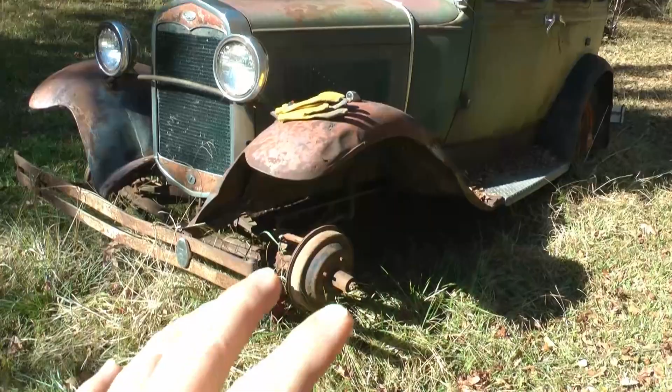But as it sits now, this car is bone stock. Stock frame, stock drivetrain, stock everything. I have not begun tear down yet. The interior appears to be a completely stock interior. The guy I bought this from said the guy he bought it from had it restored, whatever restored meant, back in the 70s.

So let me move in the shop, and I've got a pretty good list of parts — not list, I've got a pretty good stash of parts that I've already bought. Parts from Speedway, parts from Summit, and just parts from parts, pieces and parts. So let me get in the shop right quick, and I'll show you my to-do want list and talk about a few of the parts I'm going to be using. So just hold on a second.

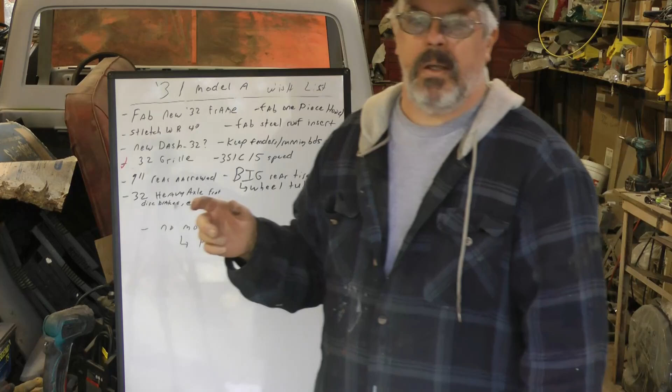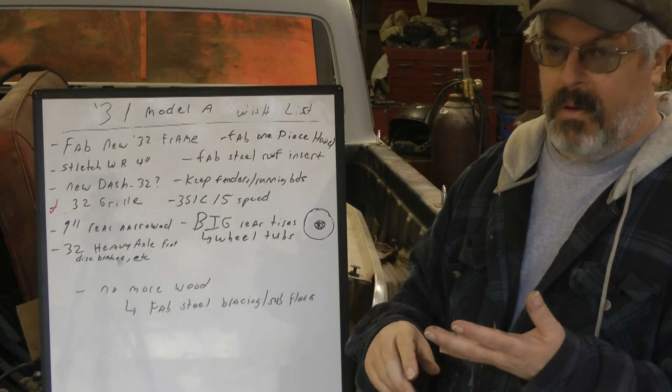Alright, so on my Model A, first thing I want to talk about is my build list, wish list, whatever you want to call it. First thing, I'm going to build a 32 style frame from scratch. I've seen a few folks do it, I've heard of people doing it, I know people have done it. I'm one of those types that if they can do it, I can do it. I've got the tools, I'm a fabricator, I can weld, all that good stuff.

Part of the reason for doing that was a couple things. I want to do it for the dollars, and I'm going to stretch the wheelbase 4 inches or so, something in that range. The reason is I'm building a street rod, so I'm going to have a modern drivetrain. Those 32 engine bays are really short. Lengthening the wheelbase will allow me not to have to squish the engine into the firewall or the radiator.

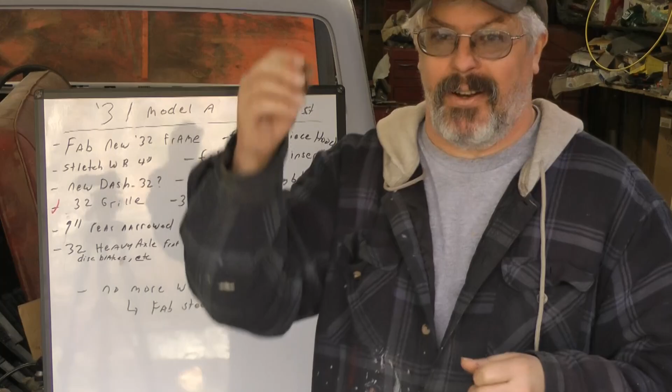Not scrunching the firewall back, up in my knees and chest. I'm not overly tall, but not short either, so I want to get as much cab room inside these things as I can. If you've never been in one, I was shocked how small those things are inside - I'd only ever seen them in magazines. You don't realize it till you get up there and see one for real. So anyway, I'm stretching the frame, making my own frame. That's wish list item number 1, or 1A, however you want to call it.

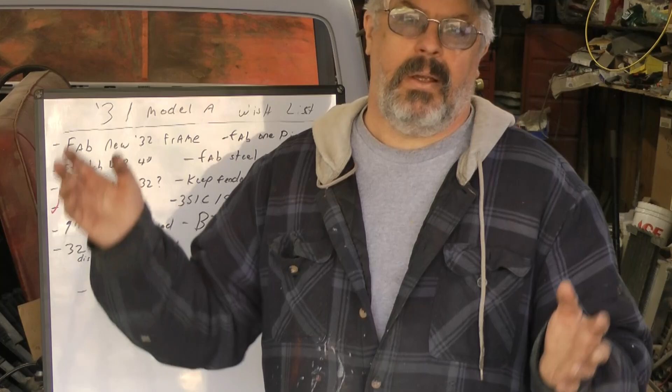I went ahead and wrote it down. Probably gonna get a new dash. As far as the fuel tank and dash goes, I'm not going to use the Model A style fuel tank obviously. So I'll take the fuel tank out and either cut the tank off and keep the original Model A cowl skin, or if the tank happens to be good - and the car's in pretty good shape, I'd say 60-40 odds it's good - I don't have the heart to cut up a good stock tank when there's folks looking for an original one that's not full of holes. I'll find out when I get that far, and if it's good I'll probably try to sell it. So anyway, it'll be a modern fuel tank, either in the back or in the side rails, something more modern.

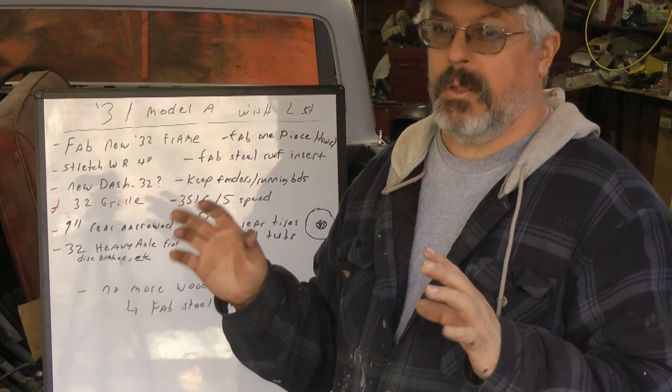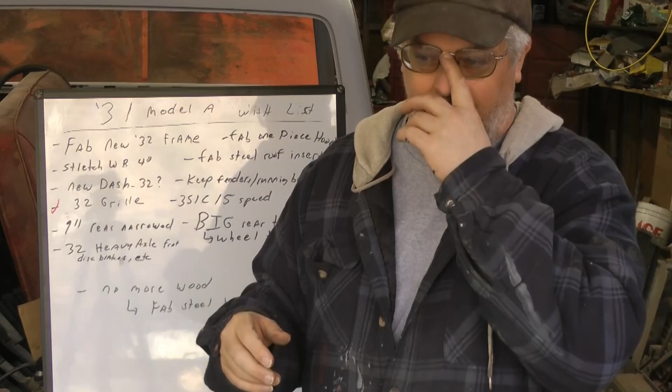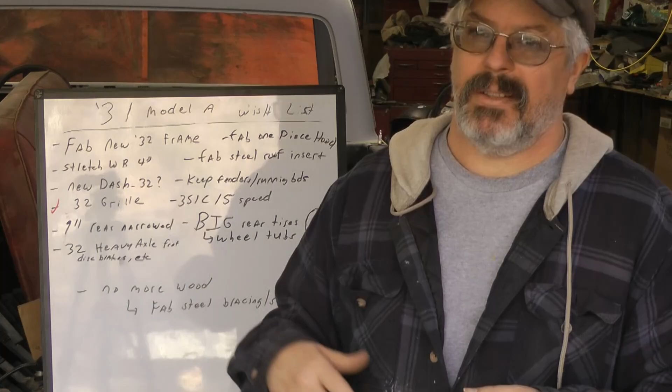Going on down the list, 2 or 3 of these items are related, part of the same big project. I'm going to put some big wide fat tires on the back. I've already bought some, I'll show you in a moment - 12-inch wide street tires. I've always wanted that big and little hot rod look. I thought about 15s or 18s, but those are really damn expensive. The 12-inch tires I bought are almost $500 a piece, so the 15s or 18s were even more. That's just going too far. I love that look, I wish I could've done it if I'd had more pocket change, which I didn't and don't. Whatever, I bought 12s.

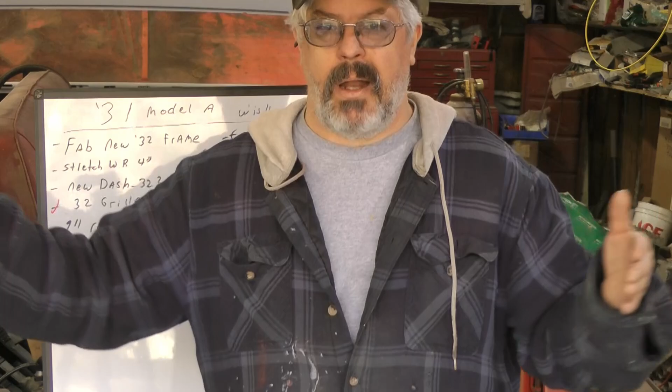So obviously I've got to narrow down a rear end. I've got a 9-inch Ford rear out of a Ford truck that's way too wide, so I've got to narrow it anyway to fit those big tires. That'll also mean some small-ish wheel tubs inside the cabin - they won't be huge, but there'll be some tubs in there, wider than normal. So anyway, a narrowed 9-inch Ford rear end, some wheel tubs, and some big old fat tires.

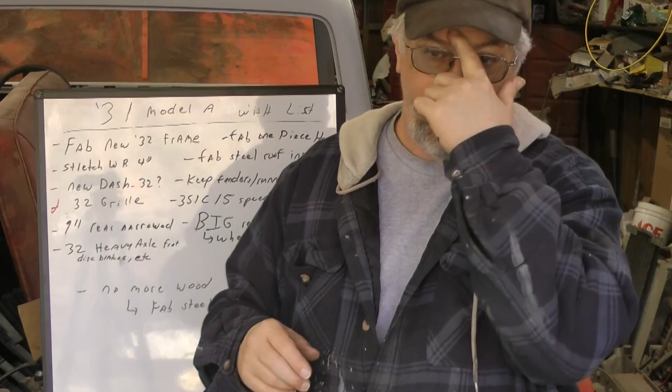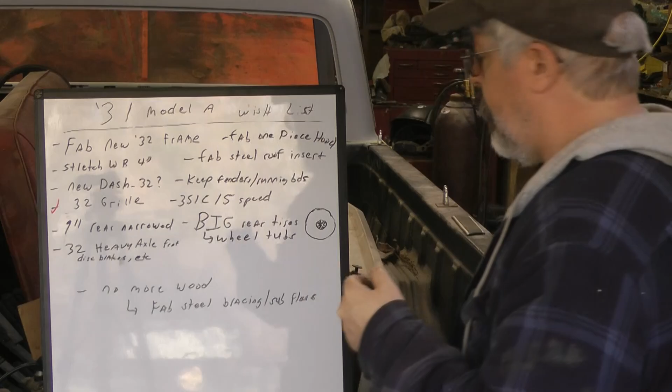As I said, I've already bought the tires, I'll show you them in a minute, the rear tires. I've already bought the wheels also, I'll show you them in a minute - well, they're in the box, I'm not going to actually unbox them. I've got a photograph, I'll show you that here in a minute too. Or maybe I won't, I may keep the wheels a secret. I don't know, we'll see.

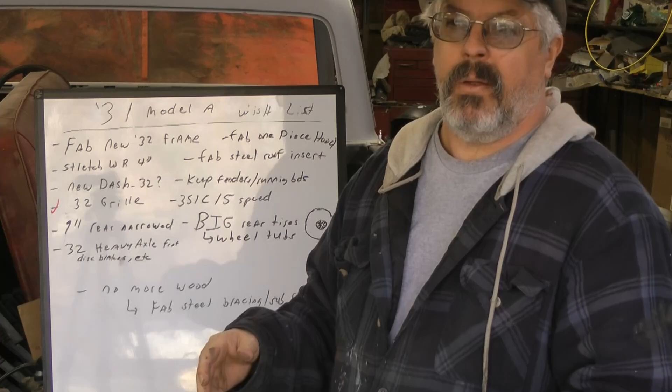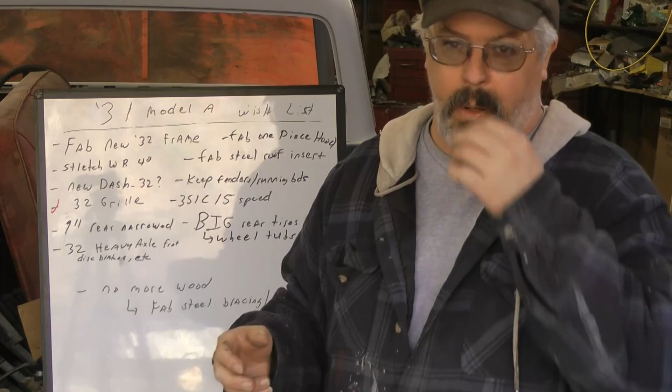As far as the front end goes, I've got a completely new front suspension, everything. That was interesting. I'm not reusing any of the stock axle, spring, spindles, none of that. It's going to be all a modern drive line, front to rear, rear to front, however you want to put it. So I'll have a complete original front end setup that I'm not using. I may wind up trying to sell it one day. I know a lot of folks are trying to build traditional and looking for that stuff, but mine's going to have a new axle, spring, spindles, everything.

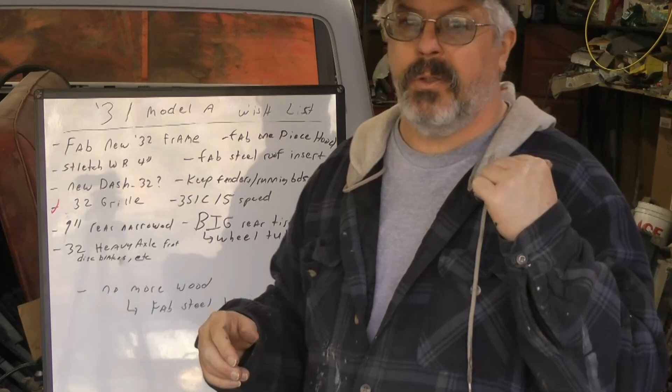I bought it all from Speedway, well, most of it from Speedway. I got a Posies 32 heavy axle reproduction axle and their spring that goes with it, and then I've got brakes. All the other stuff came from Speedway. Thank you, Speedway, by the way. Not sponsored. I bought all this stuff with my own money. No sponsorship here. Well, I ain't big enough for that yet.

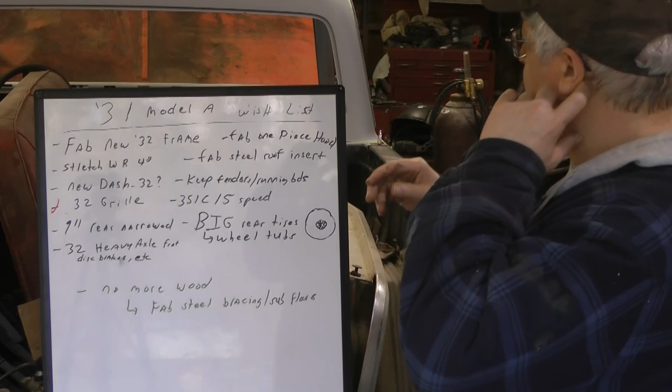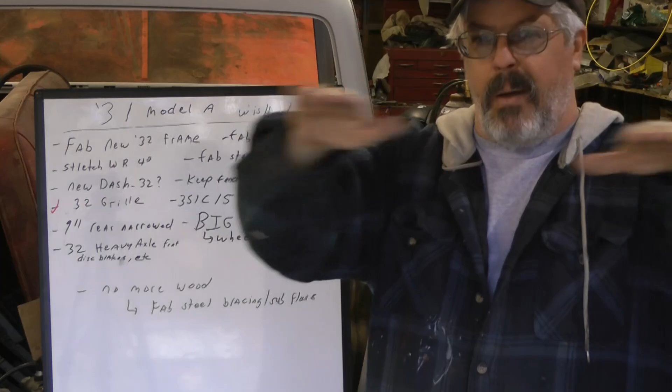But anyway, next on the list, I want to fab a one-piece hood, not really one piece top to bottom. I'm going to make a top piece. The original folds in the middle. I want to make a one-piece hood, and obviously my wheelbase is going to be 4 inches longer, which means the hood will be 4 inches longer in some fashion. So I've got to make a new hood anyway. I want to fashion a one-piece top hood. I'm probably not going to run hood sides, but then again, who knows? I haven't thought that far along to decide yet. The picture of the car I have in my head does not have hood sides, we'll put it that way. We'll see.

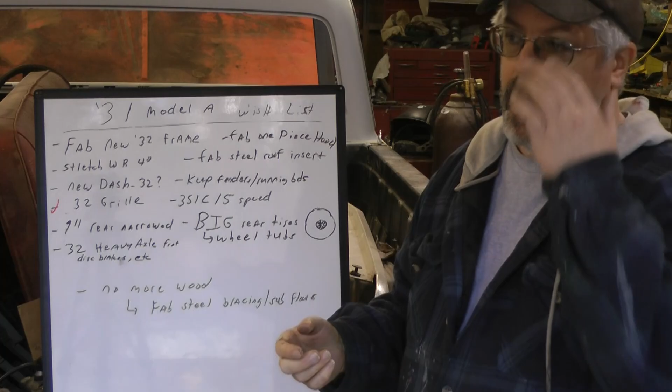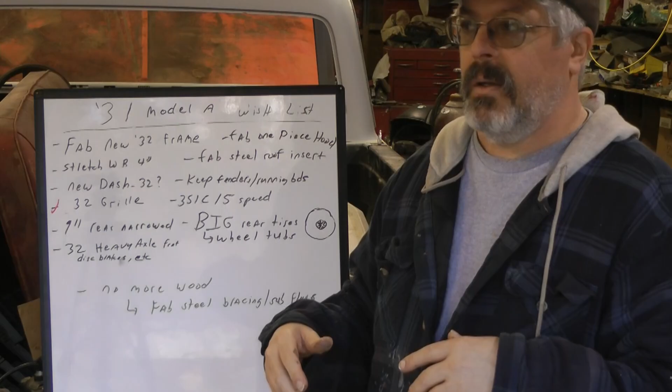Okay, for the roof, everybody knows the Model A has the insert. I guess it was fabric originally, I think. Obviously I have a Sedan, which has the bigger roof, but I want to make a steel roof insert. I'd like to buy one, but those things are expensive. The shipping is tremendously high because you have to ship them by truck. I believe I can do it. There's not a lot of curve on the edges of those things, the roof insert is mostly flat. I've watched some guys on YouTube talk about them or make them, and I believe I got some strategies. I don't have a power hammer or any of that stuff, the big tools like those guys use, but I've got some ideas in my head. I think of how I can do it with the tools and skill level I have. I think I can do it. Again, that's way down the road, but it is on the list.

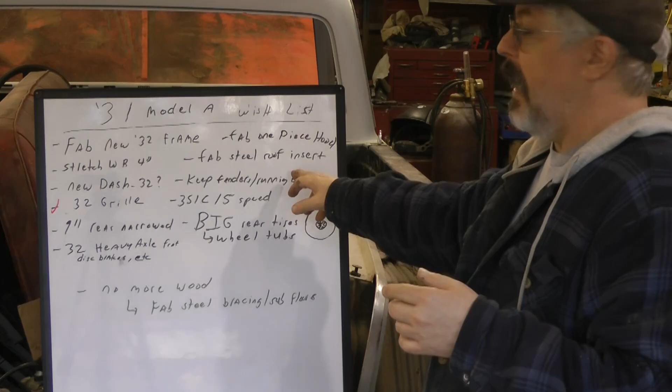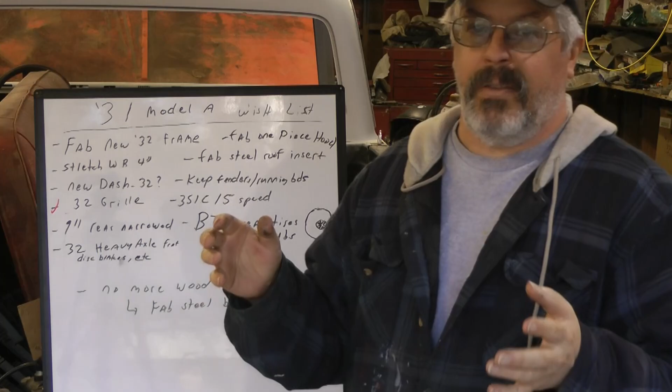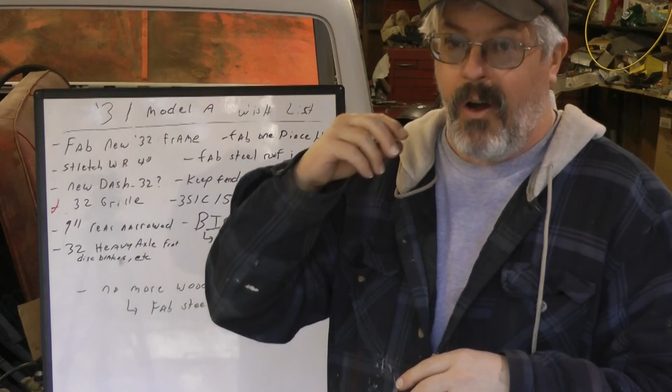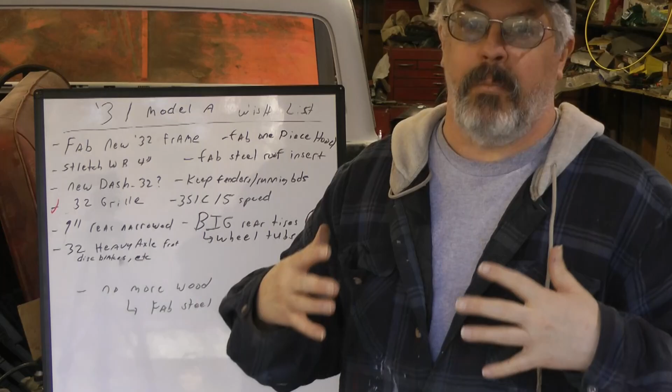Now here's a big one that I'm going to get a lot of argument over, I'm sure, if I get feedback or not. I am keeping the fenders and the running boards. Yes, I said it, I know. Fenders and running boards. I love the look of a full fendered street rod, 32 or 31, all those years, Chevrolets, it don't matter what kind of car it is, what year it is. I love the look of those fat fendered, full fendered street rods. And there's roadsters, high boys out the yin yang out there. No offense to anybody that owns those cars, they're great cars. There's some incredibly famous cars, some great cars, the roadsters and the coupes and all that stuff. I got no issues with them. But for me personally, I love the fat fendered street rod. So that's what I'm going to do. I'm keeping the fenders and I'm keeping the running boards.

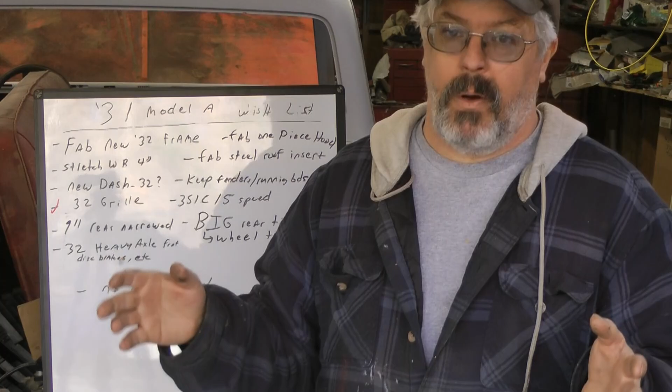Now, I know I just said 32 frame, extend the wheelbase, modern driveline, which means wishbones or something. So there's a lot of pieces of that puzzle that don't exactly fit, that I will have to work out one day. I'll have to probably make running boards, which I'm not too concerned about. The fenders are obviously totally different in the rear on a 31 to a 32. I'm talking about the front fenders, sorry. And then the wishbone sticking out and the curve in the rail, and there's a whole lot of things there that has to be worked out. I know that, but that's my plan at this point, and I hope it stays. I hope it comes to fruition. I hope it comes true.

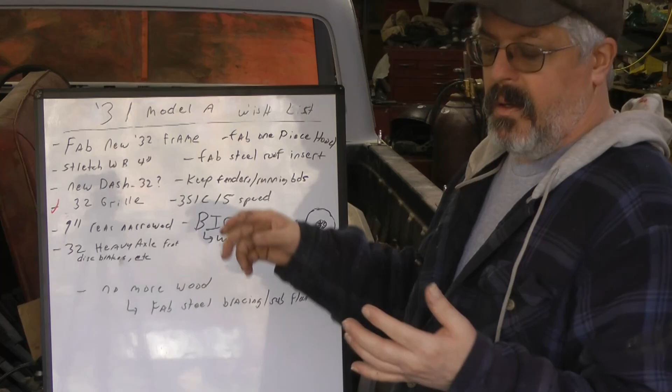As far as running gear, I've already talked about the 9-inch narrowed rear. I have two 351 Clevelands. One is an original 351 Cleveland that was in the car my dad bought new in '72. So that engine has been in my family its entire life, kind of. It's been out of the car for 20 years probably, because the car's been gone for years. But I pulled the engine out and saved it, because the Cleveland is one of my favorite Ford engines of all time.

I also have a 4-bolt main Cleveland block I bought many years ago that I may use, I don't know. What I've read over the years is that the 4 bolts on a Cleveland didn't really add a lot of strength like they did maybe on the Chevrolet - having a 4-bolt versus a 2-bolt. But I've got a complete Cleveland and a block I can build up. I'm probably going to go with aluminum heads, all that stuff. So I don't know, we'll see.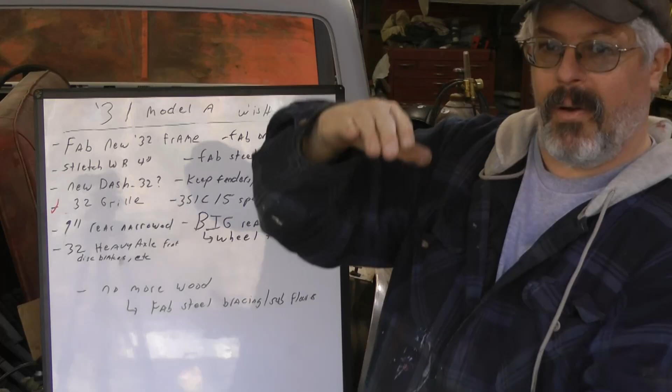I'm thinking about stroking it. That's a big... the pile of money here is just starting to grow exponentially. So I don't know, and Lord knows this little car wouldn't need that much power. The stock Cleveland alone with some good aluminum heads is going to make plenty of power for this little car especially.

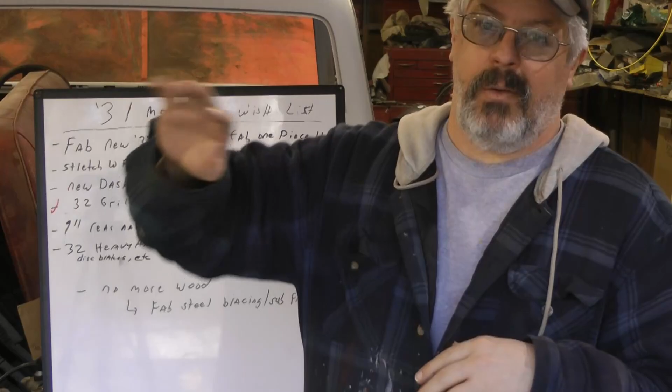Now there is a wish list item - well, not really a wish list, what's the term... whatever. I'd love to put a blower on this car, but that's, I think, $5,000, $6,000, $7,000 - way out of my price range. So that's more than a pipe dream item. Put a blower on it - that's more than 99% not going to happen.

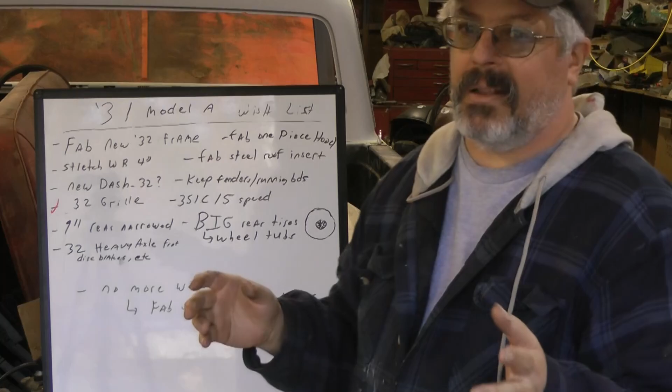I could do 2 4-barrels or 3 deuces or something different like that, I don't know. Well, that's way down the line, way out. But the point is that Cleveland's gonna make plenty of power anyway without having a blower on it or being stroked or all that mess.

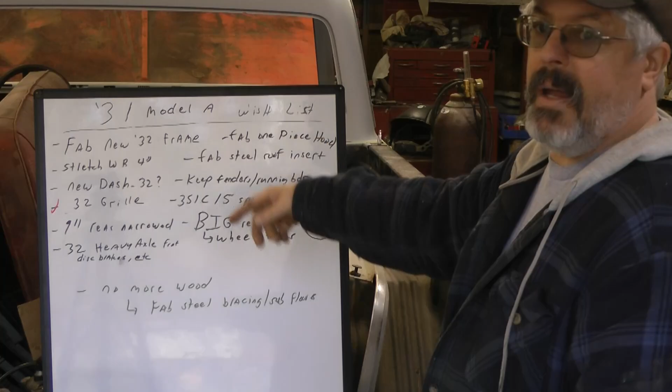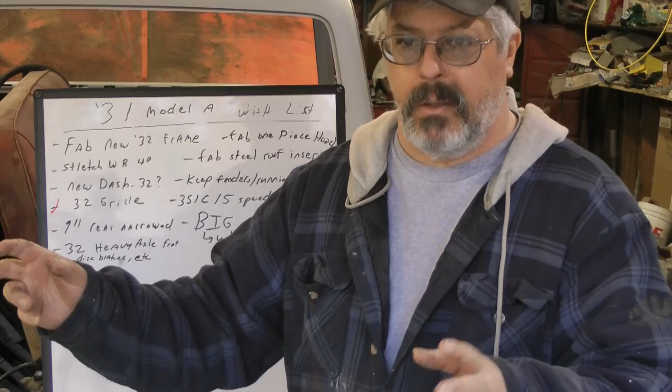So as far as my wish list goes, the things I've got written down, that's it. The one last thing I wrote at the bottom was just for my memory, to talk about it: I'm going to make a new subframe for the car. It's got to fit the '32 frame anyway. The car seems to have a pretty good floor in it, but I don't know how good it is. I'm probably just going to wind up making a new floor, new sub rails, get rid of all the wood - I'm not sure how much wood's in the sedan, that's a '31. I'm going to get rid of all the wood, whatever it takes to brace it with steel. That's what I'm going to do. New subframes, new floor, all that good stuff.

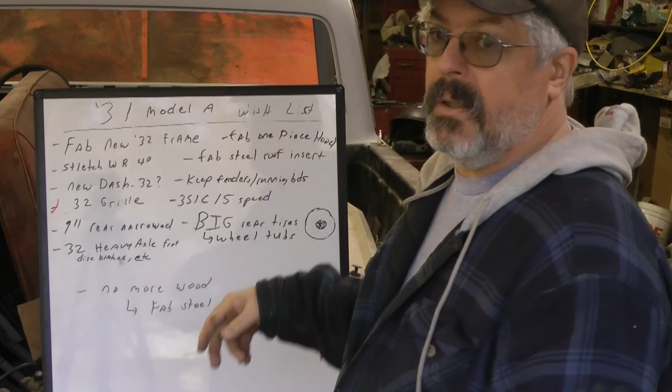So here's the rear tires. They're 12 inches wide, 29, 30 inches tall, something like that. They're Hoosier, they call them street radial, something. Black walls, you know - look up the Hoosier tire on Summit or whoever, that's the tire. I could have got Mickey Thompsons, but these seem to have a little better review on a strictly street car. I don't know, I got these.

Next is my T5 transmission, out of a Mustang. It's got the tail end shifter point, which puts it way too far back for a street rod. So I'm going to wind up going with American Powertrain or one of those companies, I forget which one - they make a new rear section that has the shifter in the S10 shifter position, way up front. They're expensive, but instead of having to find the S10 tail housing to swap onto this - if you don't know about T5s, look them up - you can put the S10 tail housing on a Mustang T5 box, which are all the same. Well, not all the same, but you can put an S10 shifter housing, which has the shifter up front, and it works a lot better for a street rod.

It's just they're hard to find now, and I think some of the internals are not as good. Anyway, you can buy this piece new from American Powertrain or somebody, it's expensive. Not sure which route I'm going to go yet, but that's a Mustang box, Mustang Ford input shaft, which will work on my Ford.

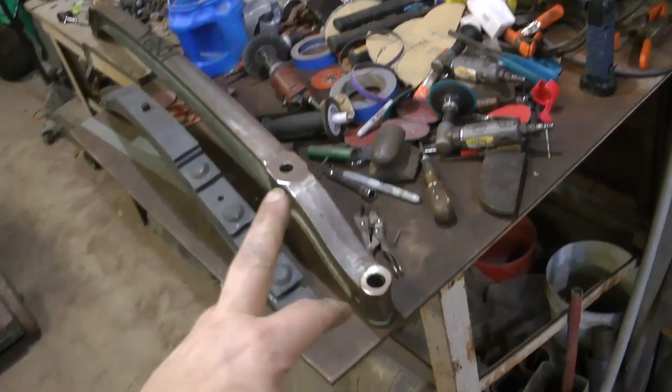Next is a front axle and spring. That's a Posies reproduction of a 32 heavy axle, which took me a long time to figure out—the 32 axle from the factory is already a 2-inch drop. I kept looking for 2-inch drop axles and couldn't find them, now I understand why, because the stock axle is already 2-inch drop. Don't be me. Anyway, that's the 32 reproduction heavy axle, and that's the spring Posies recommended to go with it. So new axle, new spring.

The rest of the suspension that I bought is all in these boxes. I'm not going to unbox that now. I've already got it stashed away where I want it till I have to get it out. So that's all right there.

These are my wheels, they're US Mags. The two rears are 15 by 10, the fronts are 15 by 7. I was going to unbox them and show them to you, but I'm going to keep those a secret. The US Mags, that gets you in the right direction, but I'm not going to show you those just yet.

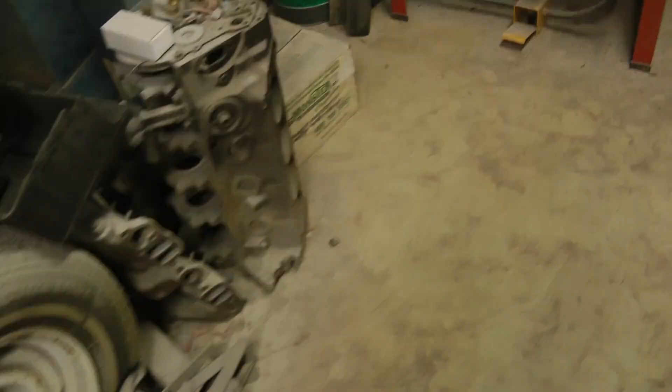So sorry, I bought a new radiator. This is a Champion aluminum radiator. I just couldn't see paying $700-800 for an AFCO or a Griffin. I'm sure they're probably worth it, you guys that have them I'm sure you're glad you got them, but I just couldn't see paying that. This Champion was like $250, it was on sale for Black Friday, $250, $225, something like that. And I upgraded to the 3-core, so it's a 3-core aluminum 32 Ford radiator, supposed to fit that shell. Hopefully it will. So that's the radiator.

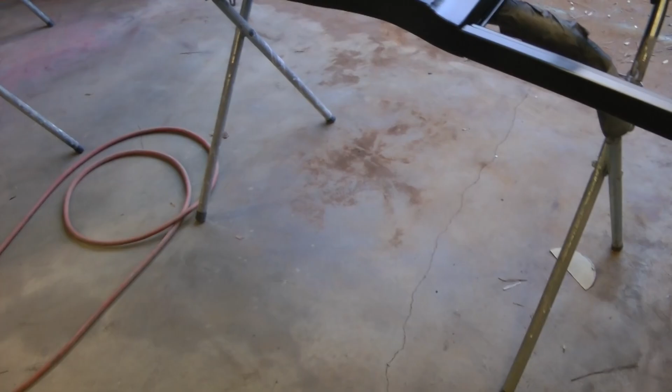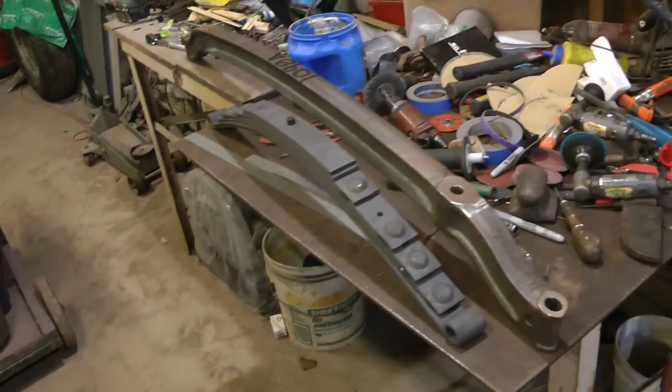If you haven't already figured it out, I need all these parts for mock-up. I've got to mock up my front end, suspension, the engine, drivetrain, transmission, radiator, all that stuff. I told you I'm stretching the frame, so all that stuff's got to be mocked up so I can see what's going to fit and what's not, and vice versa. Plus, all this stuff is from Black Friday sales—not all of it was on sale, but some of it was pretty good prices. I think that's it for the parts I have that I want to show you.

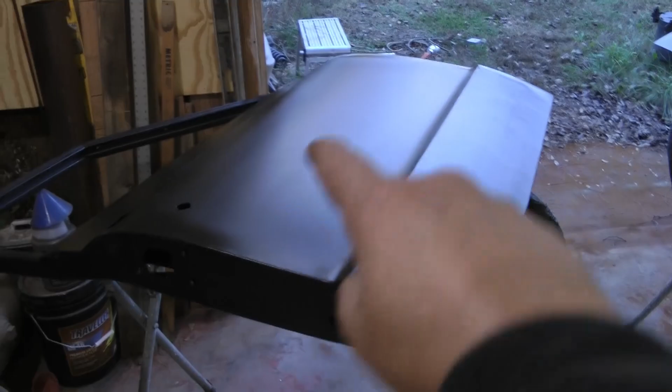By the way, I just got my dad's doors primed in epoxy primer so I can start doing the filler work. I've got to put a skim coat of filler on them. They're not bent, but the section where I planished the welds out, where it was sunk in and shrunk really bad, I do have to put filler on that. But the doors themselves, you can see the upper part of the skin is straight, there's a couple small dents in there. I just finished doing that a few minutes ago, so there's primer ready to do some filler work on. And I guess that's it.

So anyway, that's the end of the video. I know it's not a real build video, but it's a start, we've got to start somewhere. I am actively working right now on priming the doors for my dad's truck with epoxy primer. And then I've got to fix a Bobcat cylinder on my Bobcat, and I can finally get that Model A moved in here. So I'm hoping in a couple days, maybe Christmas Day, maybe before or after, just tomorrow, I'll actually have the Model A in here and start doing some teardown. I'm hoping, but every time I say that, something happens and those plans get changed.